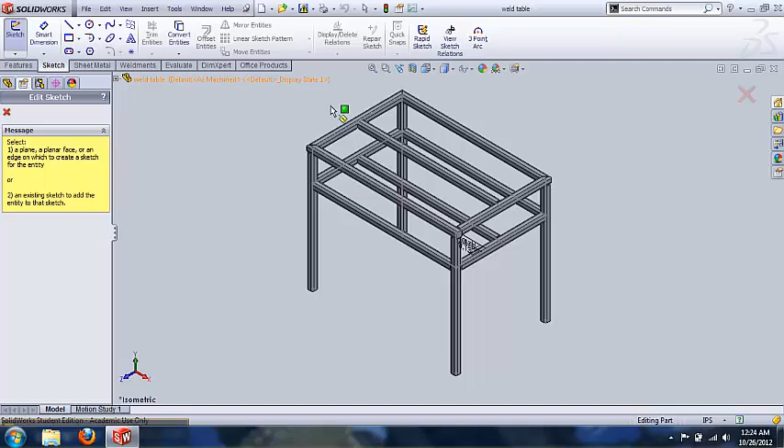So first we will create a new sketch on the top face of the frame. Click the sketch feature, click on this top face of this frame, and then we want it to be normal to that face. We will then draw a rectangle to the same size as the top of the face.

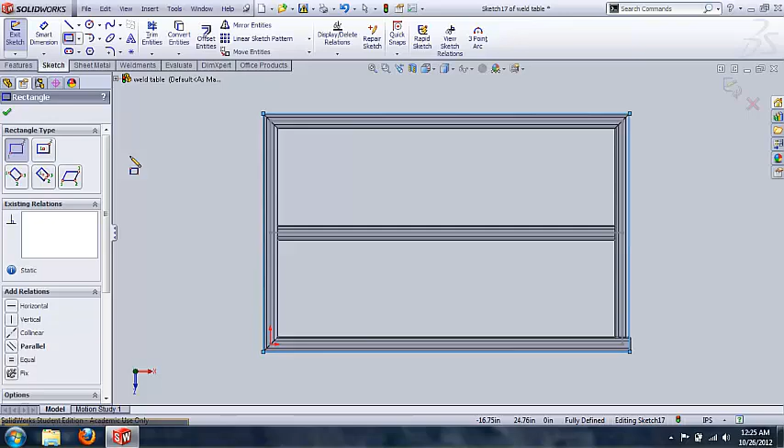So we'll click on our rectangle command, go to this corner, down to this corner. And what's nice about this is that we don't have to dimension it because we know that it will fit directly on top of our frame. So we'll exit that sketch

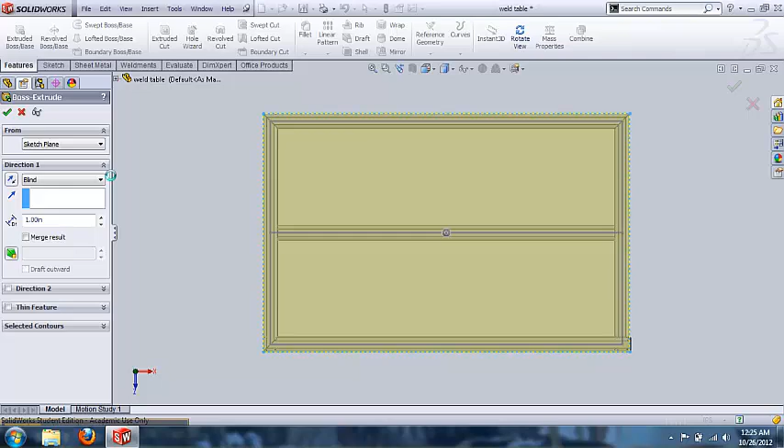and extrude that top face, and let's say we'll extrude it about 1 inch. Click OK. We now have our tabletop.

So what we'll want to do to fasten this tabletop so it doesn't move around and shift around is we'll want to make some holes that we can place fasteners in. So we'll go to our Hole Wizard, use that feature, and again we want to look at the top of our table,

and in this feature we'll choose to use the hole for the hole type, and we'll just use ANSI inch, and let's just say for argument's sake we'll use 3/4 for a size. You can probably choose any size that you would like that fits your design intent.

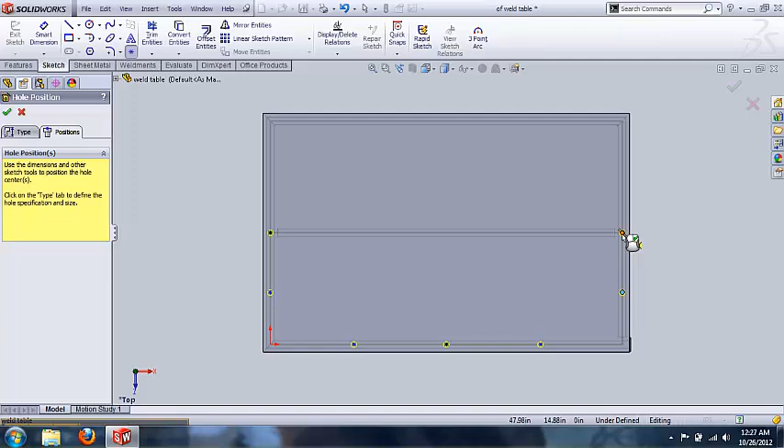And then we will go to position these holes, and what it wants you to do is to first select a face. So I'll select the top face of our table and start placing holes where I feel that it would work best. So I'll just place some holes here, one down here, over here, get that midpoint here, and just make holes all along our tabletop to fasten it down.

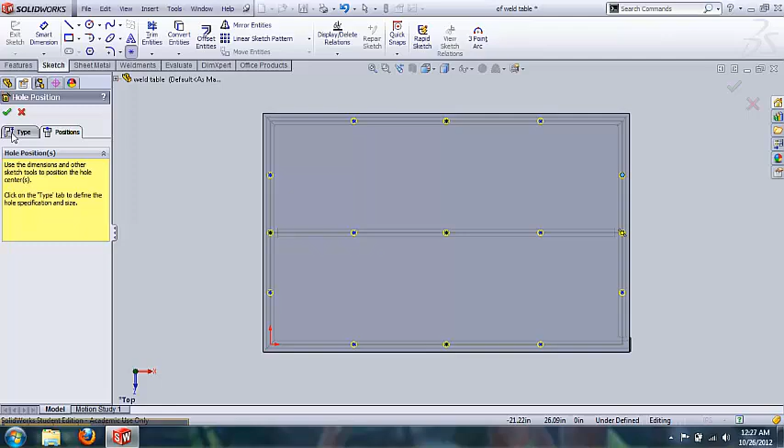Try to make them line up so they're at least somewhat symmetrical, just to make things easier to adjust later if you need to. So I think that's sufficient for now for this tutorial. So we have our holes. Let's go back into type because we need to specify how deep we want these holes to go.

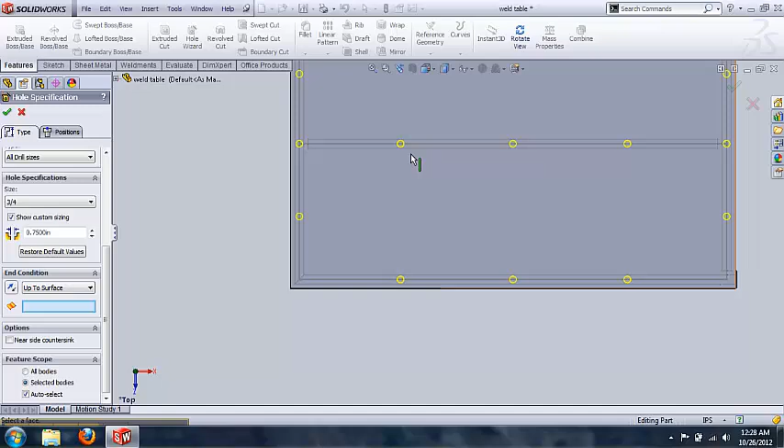So in our end condition we'll go to Up To Surface, and we'll rotate our table so we can get our proper surface that we want it to go to. Back out, and let's have it go to this surface right here, the bottom portion of our top rectangular tubing. And I think that's what we want.

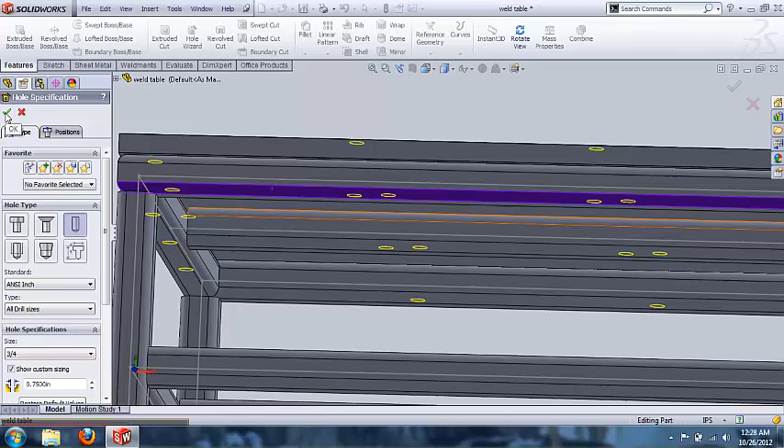So we will go ahead and click OK. And now we have our holes for our fasteners. We'll get an ISO view so we can see this a little better. Okay, now we need to go find our fasteners.

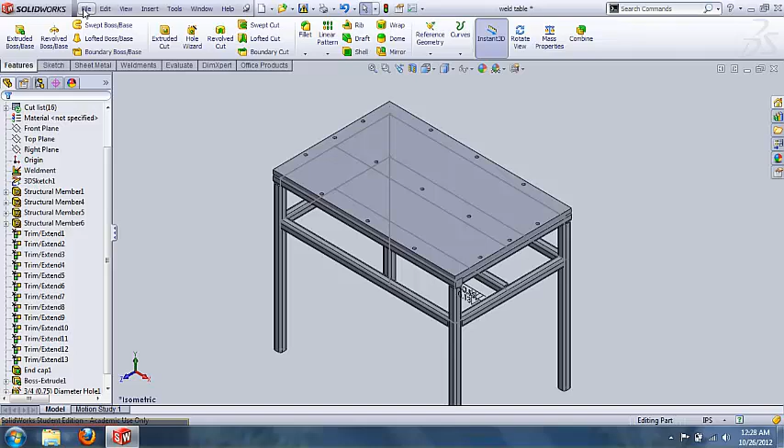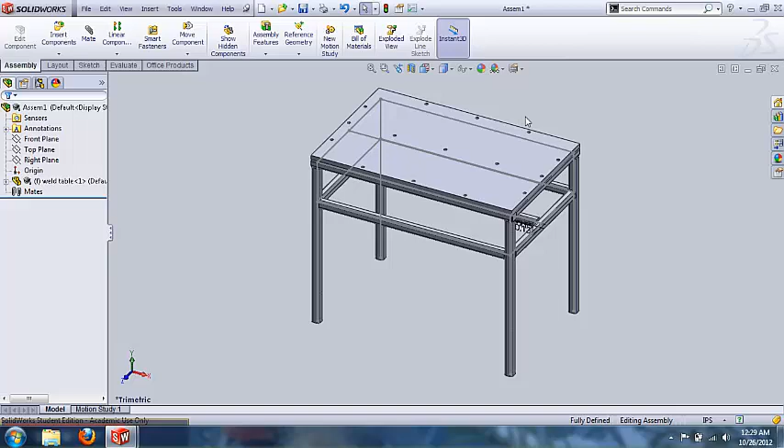So what we need to do is take our part file and make it into an assembly. So we'll go to File, Make Assembly from Part, and click OK. This will allow us then to mate the surfaces, or essentially put fasteners on them. So we'll click, there's our weld table, and to find the fasteners that we need, we want to go over to this tab over here